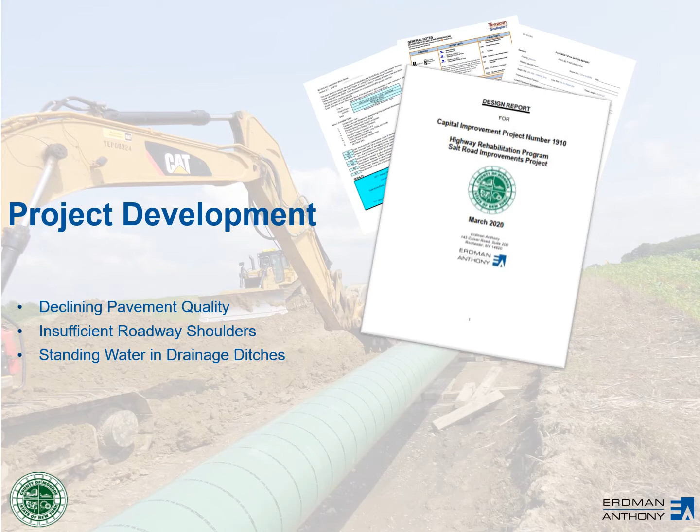Shoulders were observed to be inadequate. Previous Monroe County DOT projects to the north and south of this section provide paved shoulders for safe passage of pedestrians and cyclists. The existing narrow gravel shoulders at this portion of Salt Road do not offer the same protection. Additionally, the lack of paved shoulders led to accelerated pavement deterioration in the travel lanes. Stormwater deficiencies were also noted.

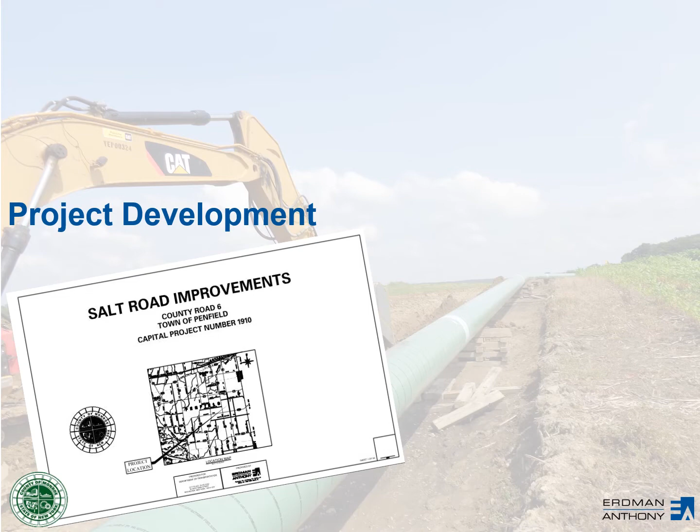Once the county reviewed and agreed on recommendations, we began the process to design plans. These plans include utility relocations, mitigation of stormwater runoff, widened shoulders, and improvements to the quality, geometry, and rideability of the highway. The existing roadway section has travel lanes between 10 and 11 feet wide. Shoulders are only paved in very limited areas. Currently, gravel shoulders extend for a few feet outside the travel lanes.

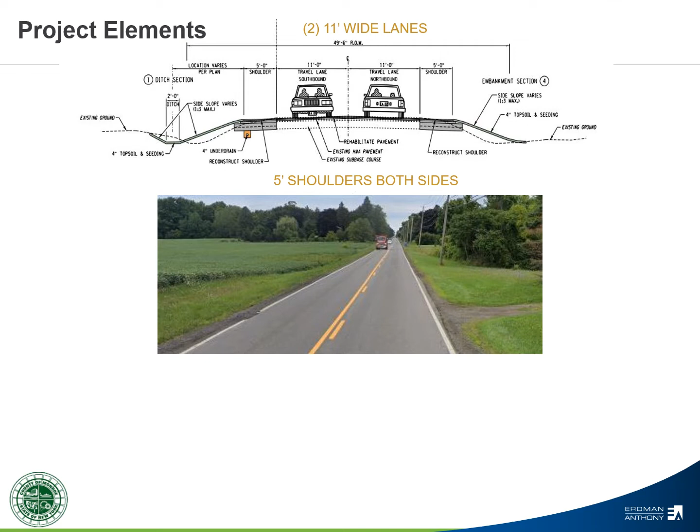The primary goal of this project is to provide defect-free 11-foot travel lanes with 5-foot wide paved shoulders in both north and southbound directions. This will widen the existing pavement by 10 feet or more. In order to widen, existing roadside features will be altered by using one of 3 edge treatments: addition of embankment material to widen the slope, ditching, or by grading gentle swales.

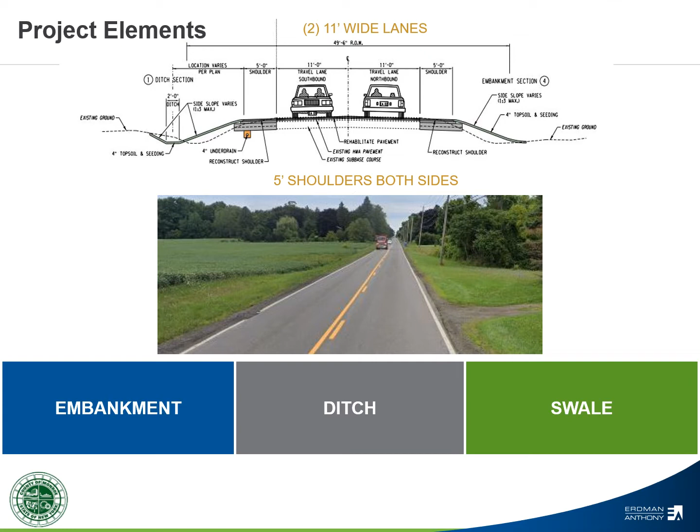Embankments, or adding fill along the outside of the road, will be selected for locations where shoulders are higher than the adjacent terrain. Fill will be graded to provide slopes as gentle as practicable to aid in maintenance. Generally, where highway embankments will be installed, slopes post-construction will be flatter than what currently exists.

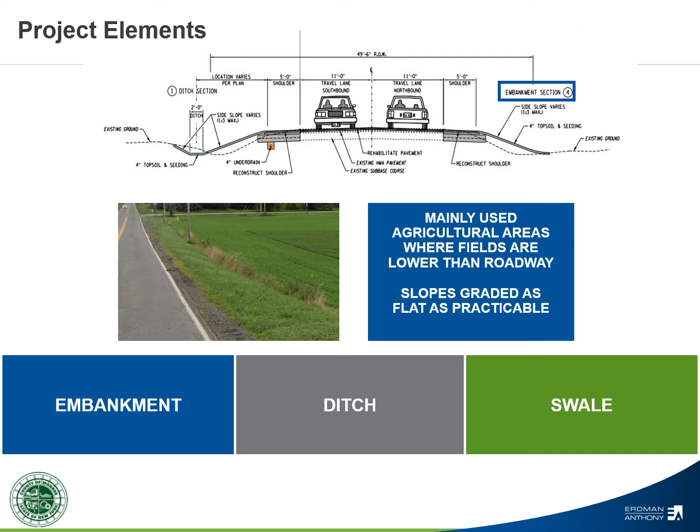In areas where either from the roadway or surrounding land large volumes of stormwater are anticipated, roadside ditches will be constructed. Ditches, in most cases, will be used in areas where they currently exist. Where possible, slopes will be graded flatter than they are now. Mainly, ditches will be adjacent to agricultural or vacant property. In limited residential lawns where they are planned, ditches will have the flattest available slopes.

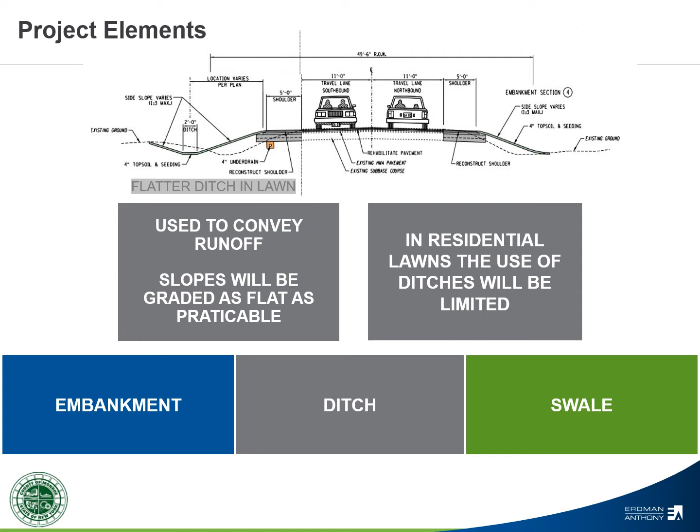The edge treatment predominantly used in lawns will be the construction of a gentle swale. The shallow depth and flat slopes will allow water to efficiently flow away from the highway while providing a surface that is designed to be easily traversed by a lawn mower. In many areas where swales are employed, stormwater inlets and piping will also be installed to meet New York State DEC requirements to reduce stormwater runoff.

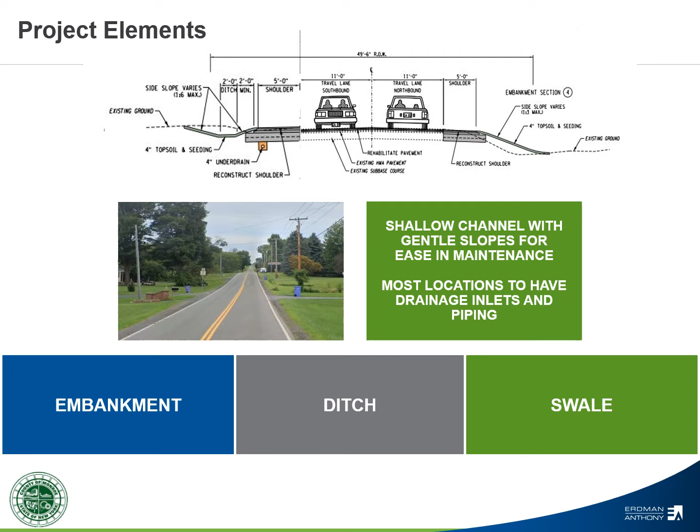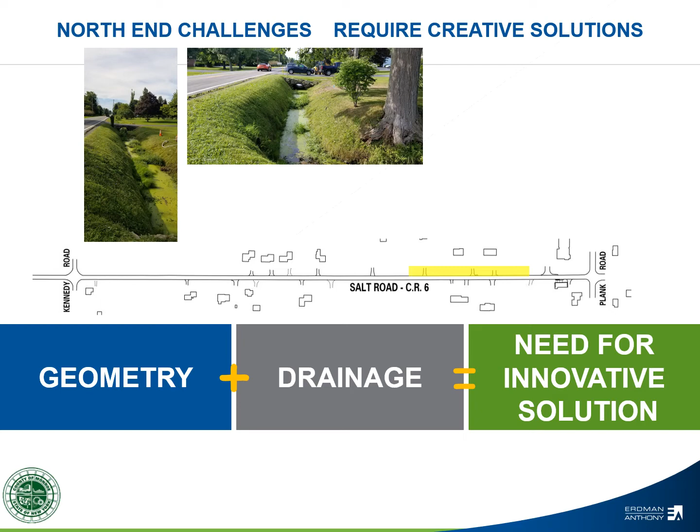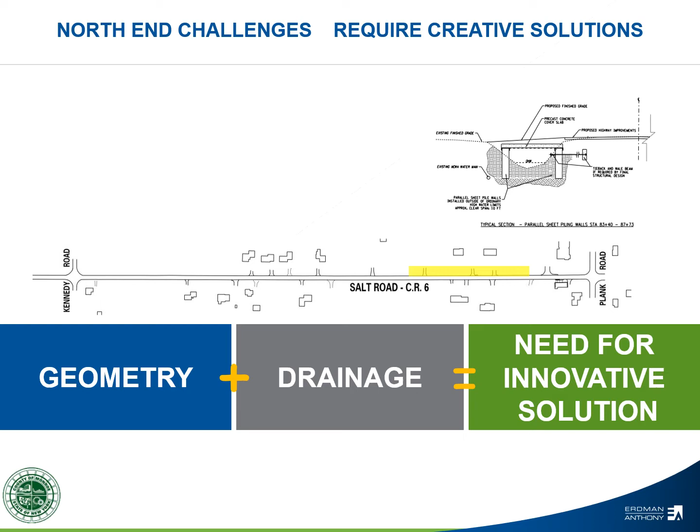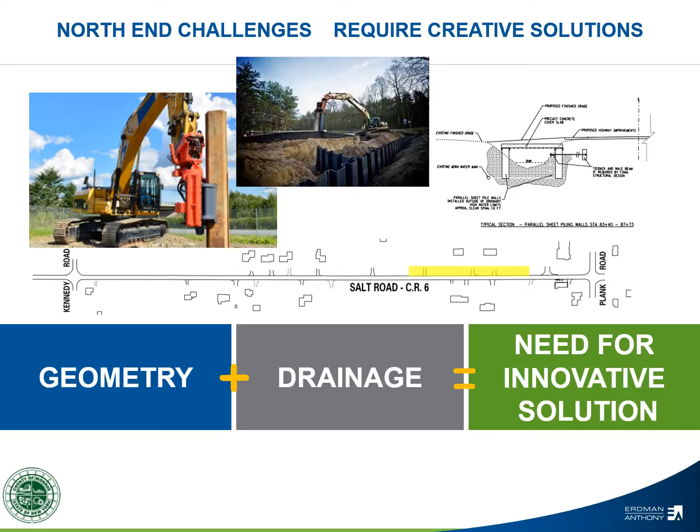In order to maintain flows, limit disturbance, and protect from hazards of standing water, a covered waterway created from the installation of parallel sheet pile walls with a concrete cover slab was advanced as the preferred treatment. Steel panels will be vibrated into the soil to a sufficient distance to support both the concrete slab over the channel and the soil on both sides. The top of the slab will be buried, making the structure mostly invisible to the traveling public. Construction of the covered waterway will require the addition of underground water and gas mains and relocation of services.

Now that we've covered what we intend to do, we'd like to give an overview of how we plan on meeting these goals. In general, the construction phase will involve acquiring necessary rights, relocating existing utilities, and constructing the permanent improvements while maintaining safe and efficient passage through the corridor.

Care has been taken to design improvements which reduce impact to neighboring properties to the full extent possible. Where it could not be avoided, Monroe County will be in contact with property owners to obtain necessary rights to ensure the success of the project.

Property owners, where easements are needed, will be contacted by a representative from the Monroe County Real Estate Department who will detail the process and assure all affected persons will receive full compensation and all benefits to which they are entitled. In most cases, a simple written agreement outlining expectations between Monroe County and private property owners will be all that is needed.

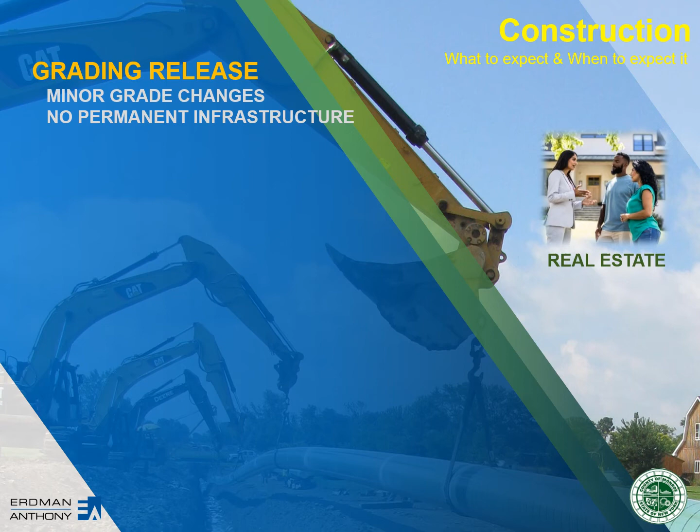Where minor grade changes outside the existing highway limits will benefit solely the adjacent property owner's ability to maintain their lawns and better access their property, the county will seek a grading release. This release will allow the contractor limited access to provide longer slope transitions, plant turf, and reestablish driveways.

Work proposed under grading releases is not integral to the project and is a courtesy to our neighbors. There will be no payment due in these areas. Where areas outside the highway boundary are needed for construction of improvements and their future maintenance, either temporary or permanent easements will be acquired. Since these operations will change the general nature of the land and somewhat limit use, compensation will be made to the property owners.

In most cases, these are areas that are already encumbered by utility easements for underground gas and water utilities, making use of land which is currently restricted. Temporary easements are used where additional room is needed to improve safety and efficiency of construction operations. Upon completion of the work, these areas will look and function similar to pre-construction conditions.

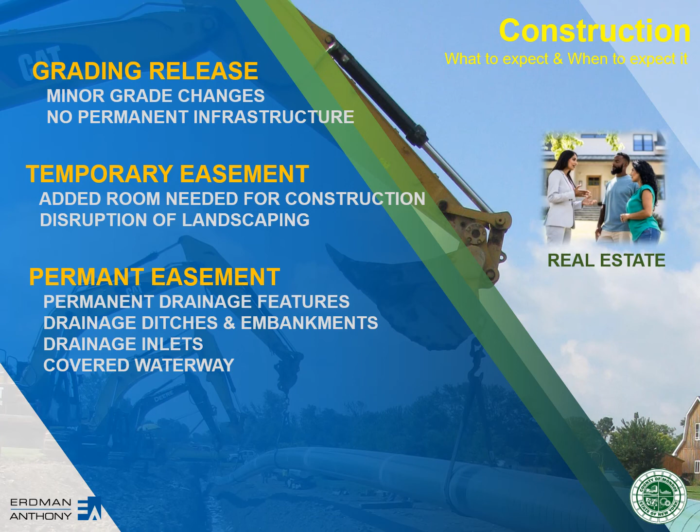In locations where infrastructure facilities such as drainage ditches, field inlets, pipes, or the covered waterway fall on private property, the county will acquire a permanent easement to ensure ability to inspect and maintain improvements in the future. Generally, throughout the project corridor, Monroe County Water Authority owns and operates a water main on the west side of Salt Road, and Rochester Gas and Electric has a gas main on the east side.

Temporary disruption may occur to individual gas or water services in isolated locations. Homeowners will be notified in advance of any loss of service. At the north end of the project, in the covered waterway section, more extensive work will be needed to relocate and build new mains.

Homeowners in this area may be subject to some additional limited duration outages as work in this area is complex and requires additional testing. Project representatives will provide special coordination with affected properties in this area to ensure as much notice as possible prior to utility disruption. Utility work may begin as early as late summer of 2021 and should be completed by the start of roadway construction.

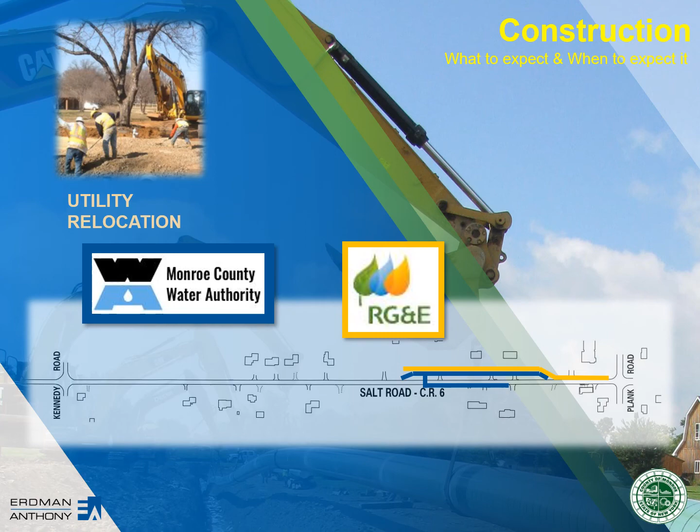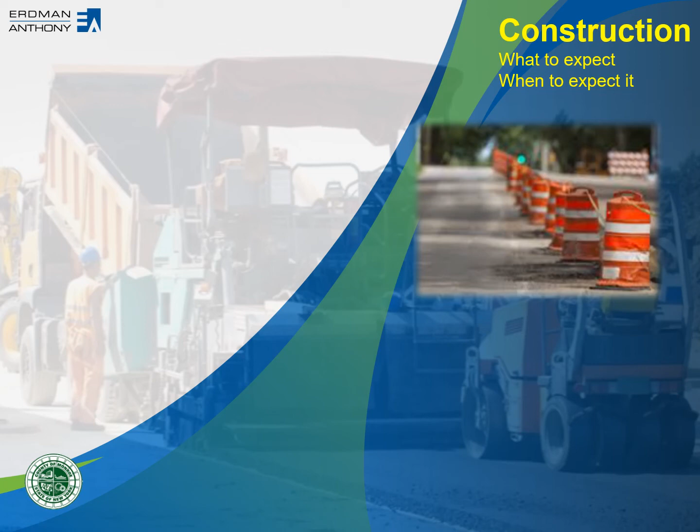Unfortunately, for all involved, there are some unavoidable realities that come with construction. Some things to keep in mind: construction work is noisy. Construction will be performed during daylight hours only and within the town's noise ordinance. Construction is dusty. Contractors will be required to use on-site water trucks and sweepers to reduce the amount of airborne particulate, but no method can provide complete control.

Pedestrians and motorists should be prepared to share the road with large machines. Lane shifts and lane closures will be used to separate construction work from the traveling public. Flaggers, cones, barrels, and signs will be used to safely direct the public. Less frequently, properties may experience temporary access modification to allow construction crews to complete the work. Residents should plan to add additional time into their daily routine when work such as shoulder widening, milling, and paving is occurring in front of their homes.

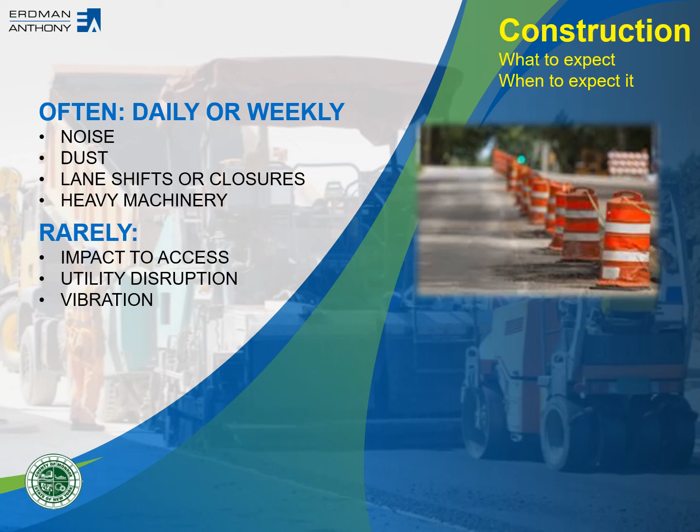As discussed previously, some disruption to utilities may be necessary and will come with advance notice. Lastly, some operations require vibration. These activities will be monitored to ensure work is kept at safe levels. Current scheduling has utility work beginning in late 2021 and being completed in early 2022. Major roadway work will start in early spring of 2022, and it is anticipated the newly widened and paved roadway will be completed in fall of the same year.